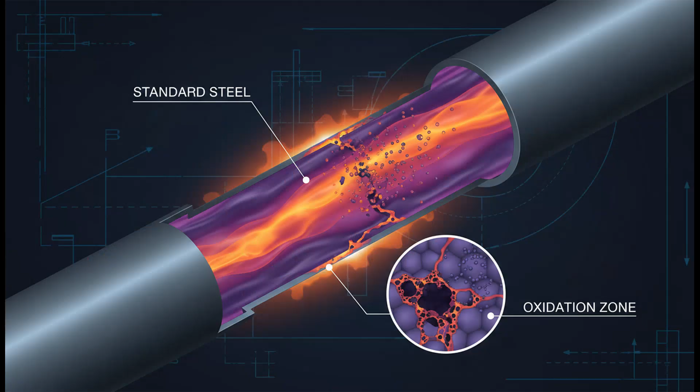Imagine water that doesn't just boil, but acts like a ghost, passing through solid rock while dissolving industrial steel like sugar. This is the supercritical realm, a physical state where the line between liquid and gas completely vanishes. Normally, we think of water as life-giving and harmless, but at 374 degrees Celsius and crushing pressures, it becomes a universal solvent so aggressive it can eat through the very pipes meant to contain it.

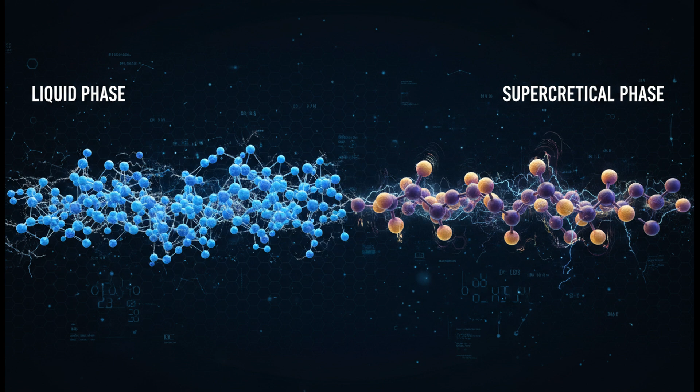Engineers at the MIT Spring Symposium recently unveiled a breakthrough that finally tames this violent fluid. It's a drill bit designed to survive the impossible, and it's about to change how we power the planet. To understand the drill, we first have to understand the water. Below the critical point, water molecules are held together by strong hydrogen bonds, but as heat and pressure climb, those bonds start to break down.

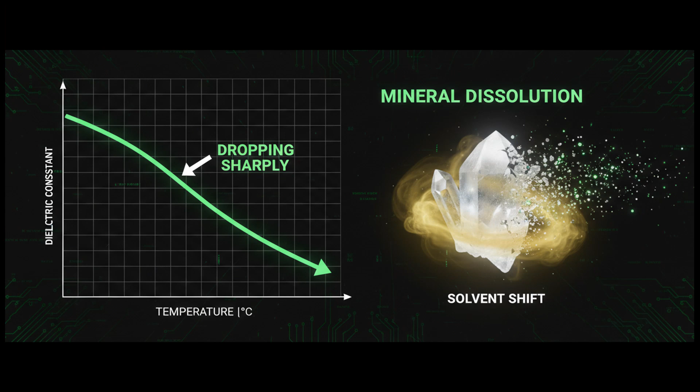Once you cross the threshold of 22 megapascals, the water enters a supercritical state. It has the density of a liquid but moves with the low viscosity of a gas, allowing it to penetrate the tiniest pores in solid granite. In this state, the water's dielectric constant drops significantly. It stops acting like the water in your tap and starts acting like an organic solvent, capable of dissolving minerals and metals that are usually indestructible.

This chemical shift is what makes supercritical geothermal so difficult. In standard drilling, water cools the bit, but here, the water is a corrosive acid that attacks the drill's structural integrity. The engineering challenge is a paradox. We need to use this water to carry massive amounts of energy, but we have to build a machine that can survive being inside its own fuel source. If we can solve this, we unlock a power source that is 10 times more energy dense than traditional geothermal. It's the difference between a campfire and a jet engine.

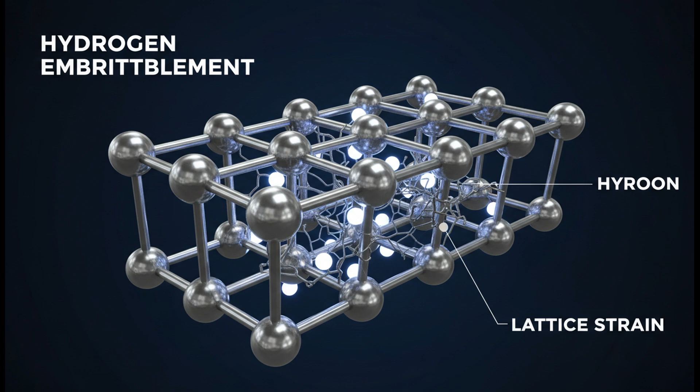The key is a phenomenon called hydrogen embrittlement. At these temperatures, hydrogen atoms from the water actually wedge themselves into the metal's crystal lattice, making it as brittle as glass. You could have the strongest steel in the world, and under these conditions, it would simply shatter the moment it hit the rock. This is why standard oil and gas tech fails instantly in the supercritical zone. To move forward, the engineers at MIT had to look beyond traditional metallurgy. They needed to find materials that don't just resist the heat, but ignore the chemistry of the water entirely.

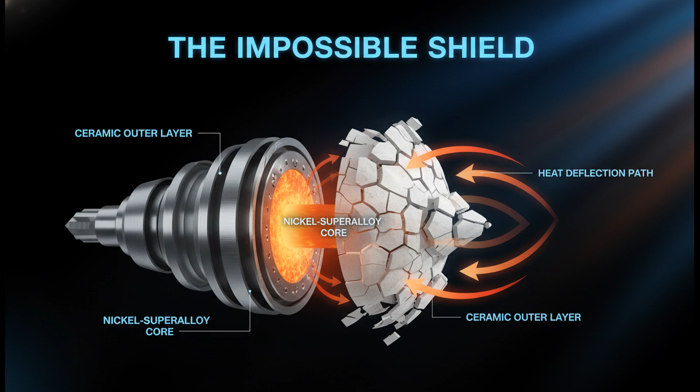This brings us to the breakthrough unveiled in March 2026, a drill bit that combines the hardness of diamond with the chemical immunity of specialized refractory coatings. It's a masterpiece of material science that turns the world's most aggressive environment into a playground for energy production. And the secret lies in how they shield the metal core. But before we look at the coating, we have to see what this bit is actually fighting against: the hardest rock on Earth, under the weight of 5 miles of crust.

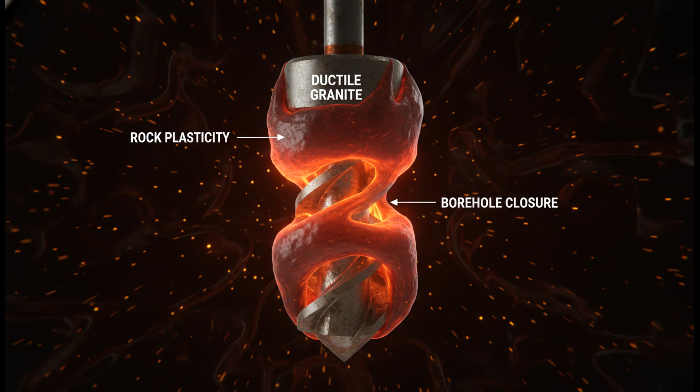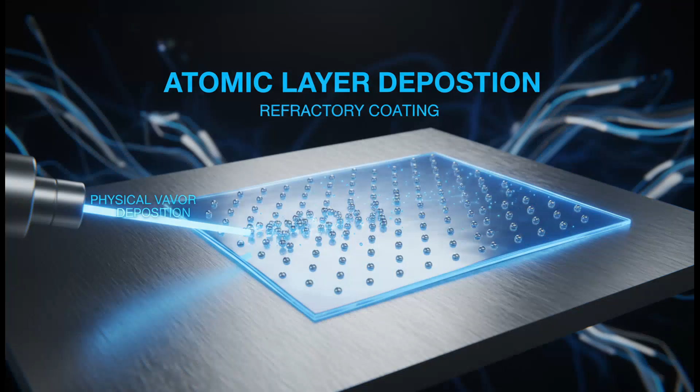Drilling through granite is usually like trying to cut through a brick with a plastic knife. At 5 miles down, the rock is so hot it becomes ductile, meaning it flows back into the hole as fast as you can drill it. To win this fight, the MIT team utilized a core made of nickel-based superalloys. These are the same materials used in the hottest parts of jet engines, designed to maintain their strength even when they are glowing white hot. But even superalloys aren't enough. In supercritical water, they would still corrode.

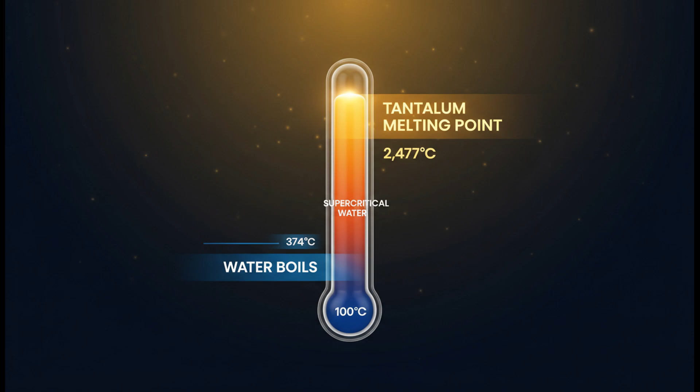The genius part is the refractory coating, a microscopic suit of armor applied one atom at a time. The coating is primarily composed of tantalum and niobium. These elements have melting points over 2400 degrees Celsius. To them, the 374 degrees supercritical water feels like a cool breeze. These coatings are applied using a process called physical vapor deposition. In a vacuum chamber, the refractory metals are turned into a plasma and blasted onto the drill bit, creating a bond that is virtually unbreakable.

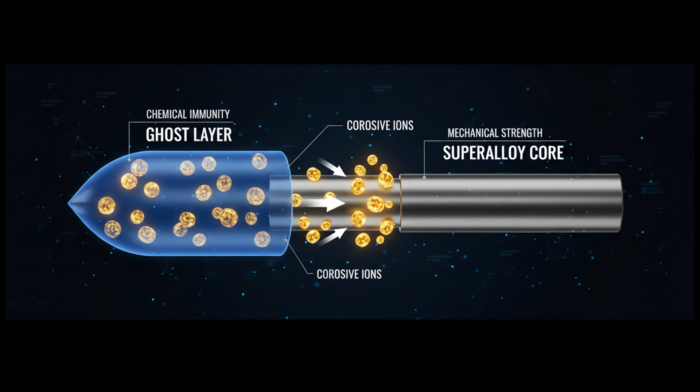This creates a chemical ghost layer. The supercritical water sees a ceramic-like surface that it can't dissolve, while the superalloy core provides the mechanical strength to handle the torque of drilling. But a drill is only as good as its teeth. For the cutting edges, MIT used polycrystalline diamond compacts, or PDCs. These are synthetic diamonds grown in massive presses at pressures that mimic the Earth's interior.

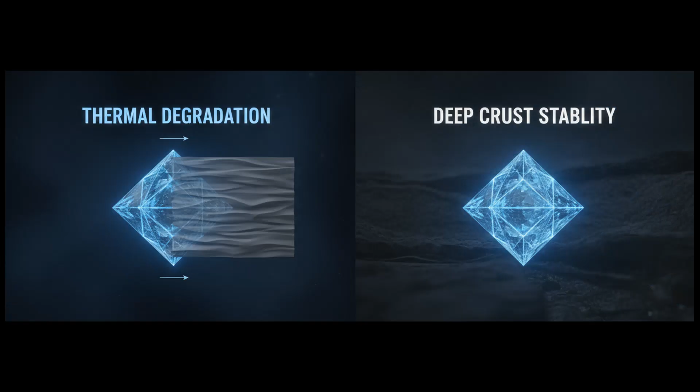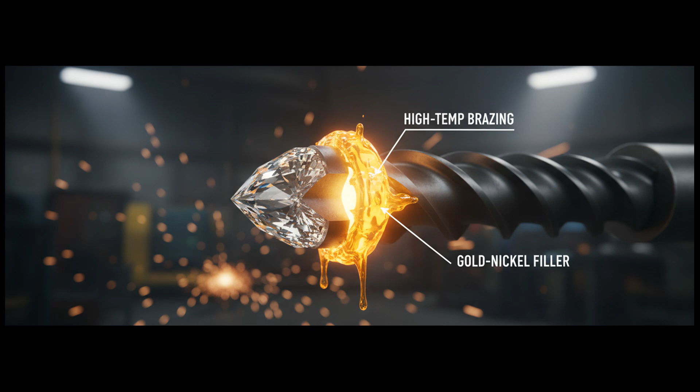Usually, diamonds are vulnerable to heat. They can actually turn back into graphite if they get too hot in the presence of oxygen. But in the deep, oxygen-free environment of a geothermal well, they are the ultimate weapon. These diamond teeth are brazed onto the bit using a specialized gold-nickel filler. It sounds expensive, but when you're drilling a multi-million-dollar hole, you want the best materials humanity has to offer.

The engineering doesn't stop at the materials. The bit's geometry is designed to use the supercritical water itself. Tiny nozzles blast the fluid at the rock face, using the water's high density to help erode the granite. This is hydromechanical drilling. The diamond teeth crush the rock, and the supercritical jets clear the debris instantly, preventing the bit from getting clogged in this sticky, hot environment.

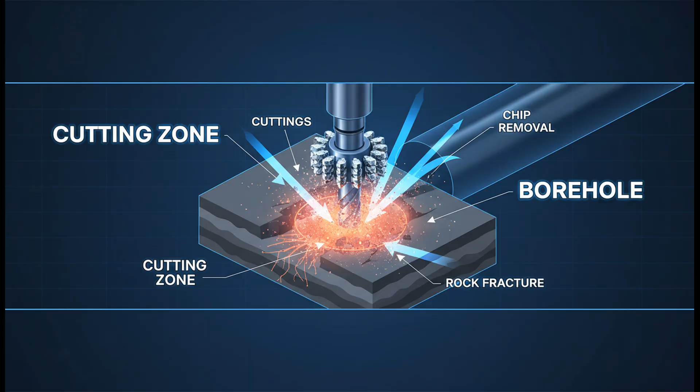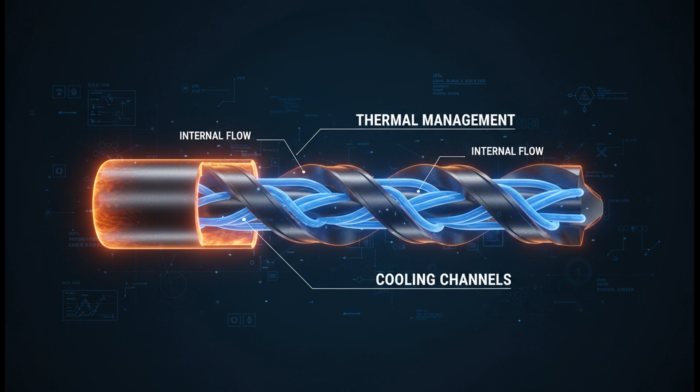It's a perfectly synchronized dance of physics and chemistry. The water that wants to destroy the tool is actually being used as a weapon to clear the path. To manage the heat, the bit also features internal cooling channels. Even though the surrounding environment is 400 degrees, the fluid flowing through the center is kept just slightly cooler to maintain the bit's structural stiffness.

This is basically a liquid-cooled computer, but instead of a CPU, it's a 500-pound rotating hammer eating its way through the crust of a planet. The result is a tool that can stay down hole for hundreds of hours, whereas previous designs would melt in minutes. Now it's time to see where this beast is being unleashed.

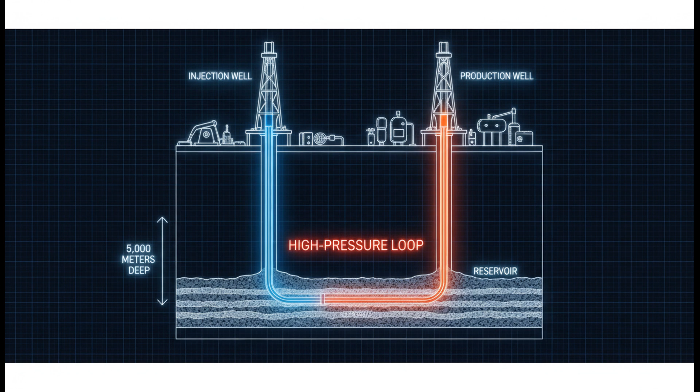All this lab-grown tech is being put to the ultimate test at the Utah FORGE site. This isn't just a research lab, it's a massive industrial proving ground where engineers are drilling miles into the Earth's crust. The logistics are staggering. They aren't just lowering a drill, they are managing a high-pressure plumbing system that spans kilometers of vertical rock. Every component must withstand the weight of a mountain.

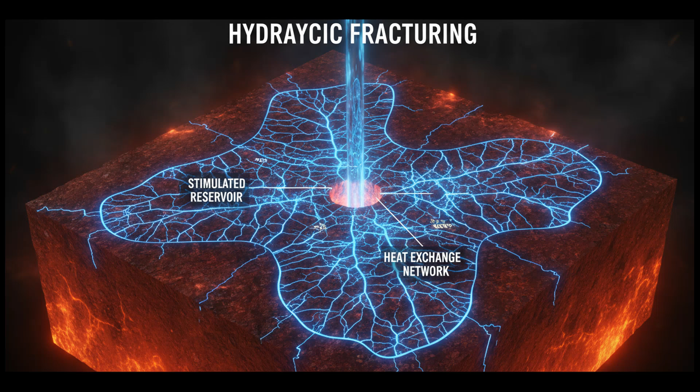At these depths, the pressure is so high that the steel drill pipe itself behaves like a wet noodle. Managing the vibration and torque from 5 miles away is like trying to perform surgery with a 50-foot straw. The Utah site is unique because it uses enhanced geothermal systems. They don't look for existing hot springs. They create their own by fracturing the hot granite and pumping water through it.

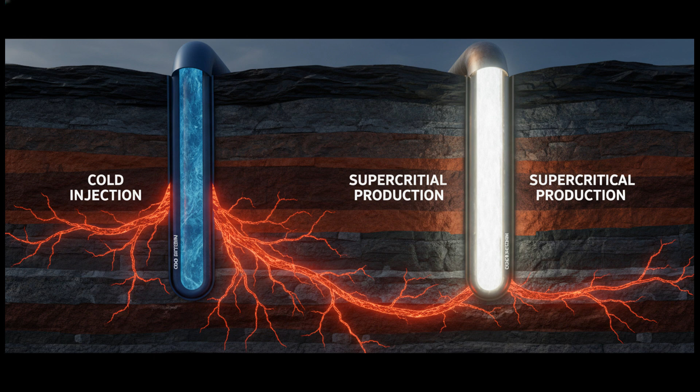By using the new MIT bits, the team can reach depths where the rock is naturally hot enough to create supercritical steam. This turns the Earth itself into a giant high-efficiency boiler for carbon-free power. This is a closed-loop system. The water is pumped down, heated by the rock, used to spin a turbine, and then sent right back down to do it again. Zero emissions, 24/7 power.

The hardware at the surface is just as impressive. To handle supercritical fluids, the valves and turbines have to be made of the same exotic alloys as the drill bit. We're talking about pressures of 3,000 psi and temperatures that would melt lead. The engineering margin for error is zero. One failed seal could result in a catastrophic release of energy, but the payoff is worth it.

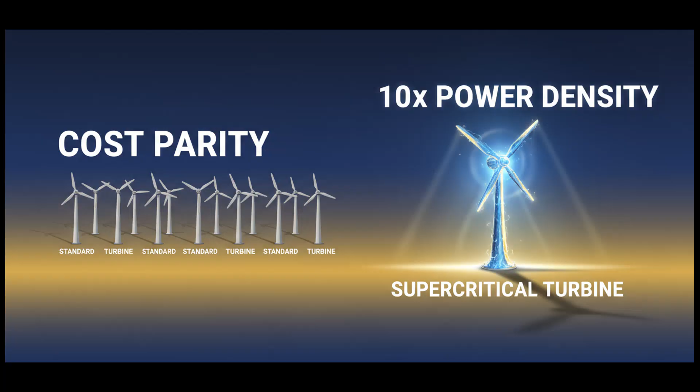A single supercritical well can produce as much electricity as 10 traditional geothermal wells, making it finally competitive with fossil fuels. The most exciting part, this isn't limited to Utah. Hot rock exists everywhere on Earth if you drill deep enough. With these new bits, we can turn any spot on the map into a power plant. Imagine a world where energy is no longer a matter of geography.

No more oil fields, no more coal mines, just the heat of the planet itself, tapped by a drill bit that refuses to die. It's the ultimate engineering victory, using the very materials that make our modern world to unlock a source of energy that will last as long as the Earth itself. The MIT Spring Symposium of 2026 will be remembered as the moment the supercritical barrier was finally broken. We've gone from fearing the universal solvent to harnessing it.

Next time you flip a light switch, think about the miles of rock and the impossible chemistry happening beneath your feet. The heat of the Earth is finally within our reach. We are no longer just living on the surface of a planet. We are finally learning how to use the engine that runs it. And that engine is just a few miles down.